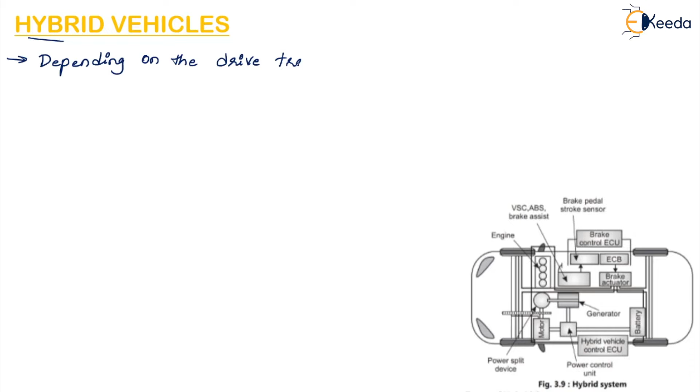So depending on the drivetrain structure, that is, drivetrain structure here means how the motor and engine are connected. This is called the drivetrain. Okay. So we can distinguish the hybrid vehicles as series hybrid vehicles, parallel hybrid vehicles, or the third one, the combined hybrid vehicles. So these are the important types of hybrid vehicles.

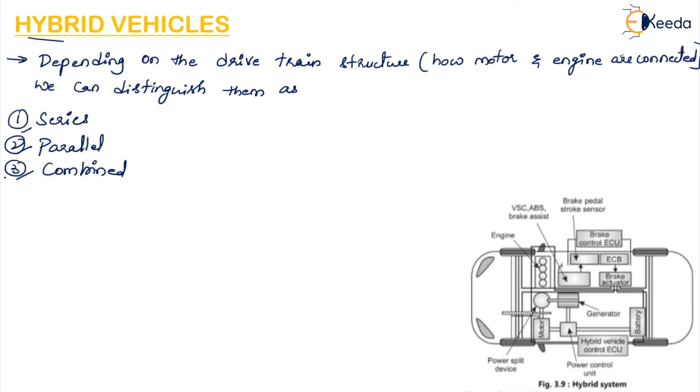So motors are the workhorses of the hybrid electric vehicle drive systems. So here motors, that is nothing but the electricity driving part, are the workhorses. They are called the workhorses of hybrid electric vehicles. So this electric traction motor will drive the wheels of the vehicle. Why are they called the workhorses? Because the electric traction motors will drive the wheels of the vehicle.

So in a traditional vehicle, the engine must ramp up before the full torque can be produced. Here, an electric motor will provide the full torque at low speeds. So, usually in the vehicles which are driven on fuels, what happens? The engine must ramp up, or it must start up, before the full torque can be developed. But here, in these hybrid vehicles, this electric motor will provide full torque at low speeds. So the electric motor will provide full torque at low speeds.

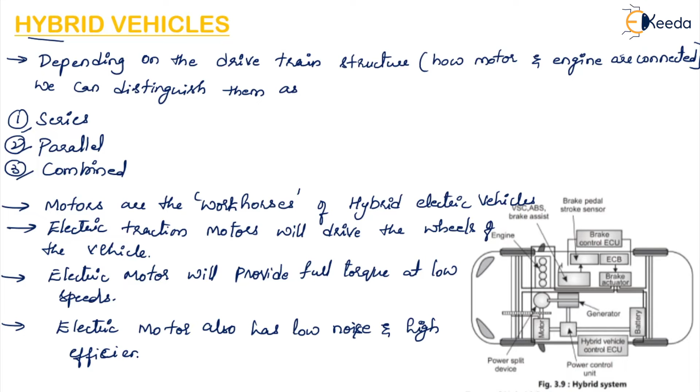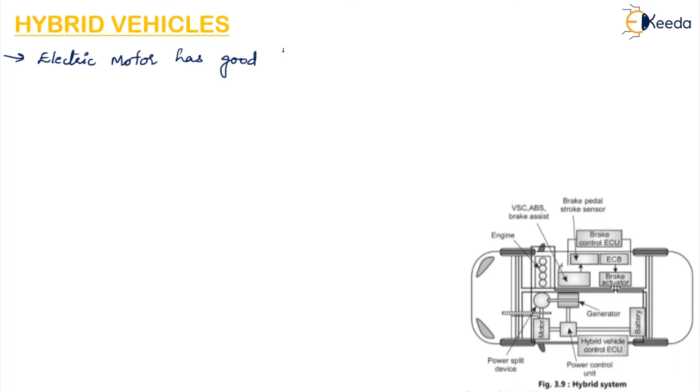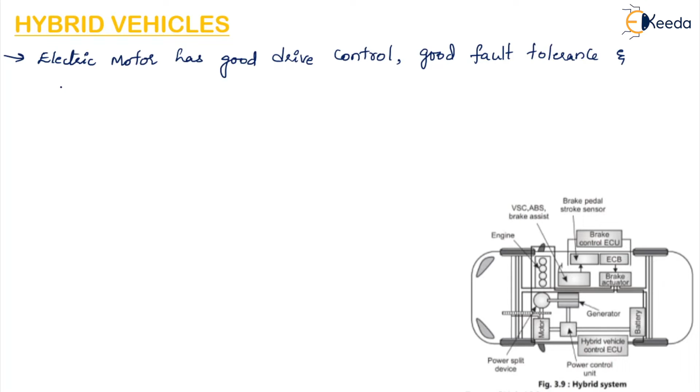So there are other advantages of the motor as well. The other advantages of this electric motor are that it has good drive control, good fault tolerance, and flexibility in relation to voltage fluctuation. Okay, so it will provide so many advantages.

So the main advantage of this electromotor is the possibility to function as a generator. So this motor can also function as a generator. So the main advantage of this electromotor is the possibility to function as a generator.

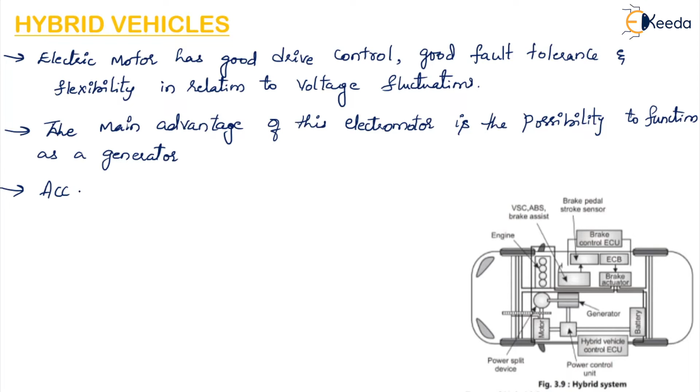And also accessories like power steering and air conditioning are powered by electric motors instead of being attached to the combustion engine. So here we see so many advantages of using these electric motors. Usually accessories like the power steering and air conditioning are attached to the combustion engine, but when you use these electric motors it can help them to function and it will provide the necessary power.

Are powered by the electric motor instead of being attached to the combustion engine. So what is the advantage of this, that is, the accessories being attached to the motor?

So the advantage is the efficiency gains, as the accessories can run at constant speed or can be switched off regardless of how fast the combustion engine is running. So we can see that the accessories can be switched off whenever we want, irrespective of how fast the engine is running. And also the accessories will run at a constant speed.

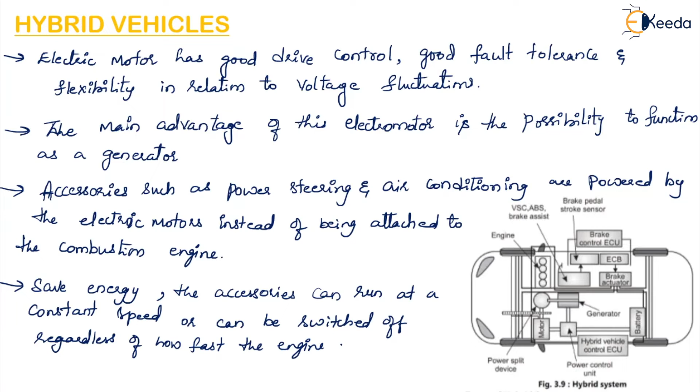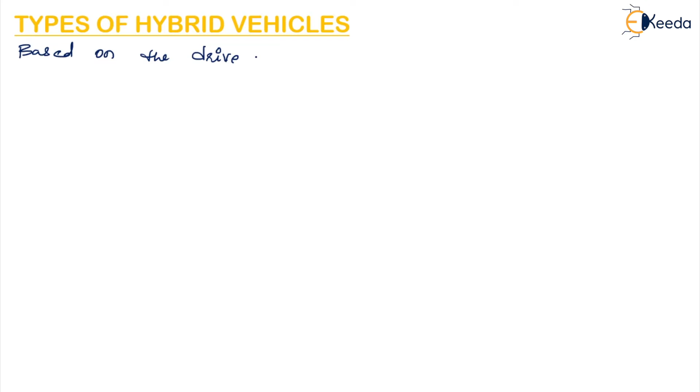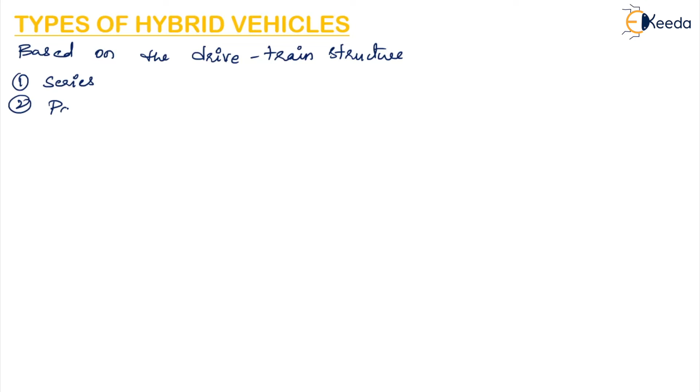Now we will discuss the types of hybrid vehicles. Based on the drivetrain structure, they are classified into three types. So based on the drivetrain structure, that is how the motor and the engine are connected, they are classified as series hybrid vehicles, parallel hybrid vehicles, and the third one is the combined, or series-parallel hybrid vehicle.

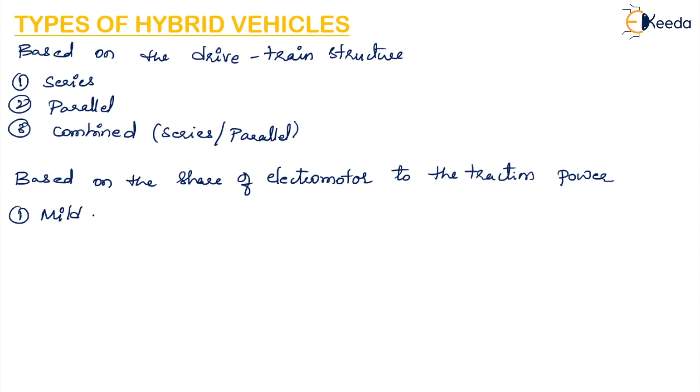Now, depending on the share of the electromotor to the traction power, that is, how much the electromotor is used to generate the traction power, they are classified as: first, the mild or micro hybrid vehicle; second, the power assist hybrid; third, the full hybrid; and fourth, the plug-in hybrid. So these are the different types of hybrid vehicles.

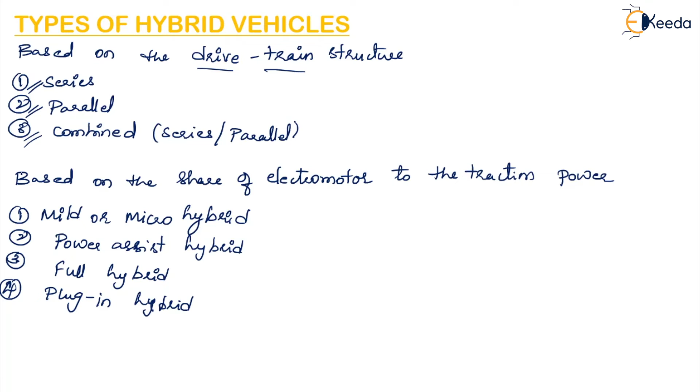So now we will discuss the important form, that is, how these vehicles are classified based on the drivetrain: the series, parallel and combination of series and parallel vehicles. Under normal driving conditions, the engine power is divided by the power split device. Here this circle is the power split device which we have already seen in the first figure. It will divide the engine power produced by the engine.

So some of the power from the engine, split by this power split device, will turn the generator, which in turn will drive the motor. Then the rest of the power drives the wheels directly. Here we can see A, B and C. B is referring to the electric motor which is driven by the generator. The wheels are driven by the power of the engine. So half power is used to run the generator, half is directly used to run the wheels, and the generator in turn runs the electric motor. The power allocation is controlled to maximize the efficiency.

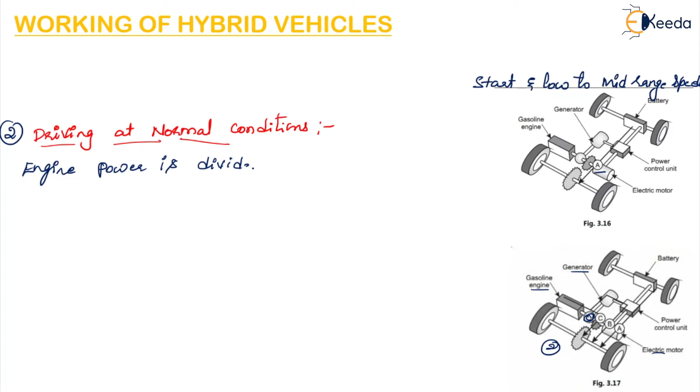So here engine power is divided by the power split device. Some of the power turns the generator, which in turn drives the motor. So here the motor is referred to with the letter B.

The rest of the power drives the wheels directly, that is C. So power allocation is controlled to maximize the efficiency.

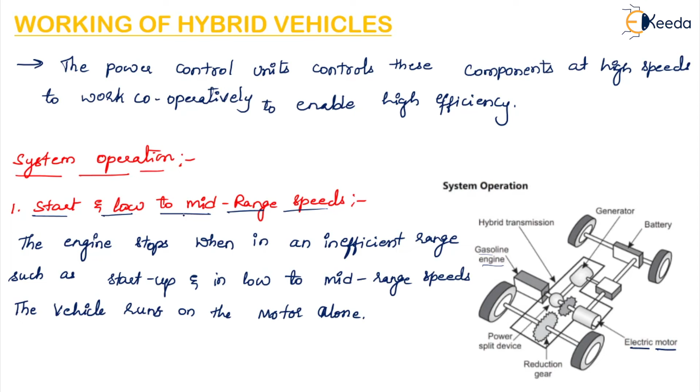So we have seen at start and low and mid range speeds how the engine is working, and at normal driving condition how it is working. Then we will see how the engine is working at sudden acceleration. So this is figure 3, which is showing how the engine works at sudden acceleration.

So when there is sudden acceleration, then extra power is supplied from the battery, which is given as A, while the engine and high output motor provide smooth response for improved acceleration characteristics. So when there is sudden acceleration, the extra power which is required is supplied by the battery.

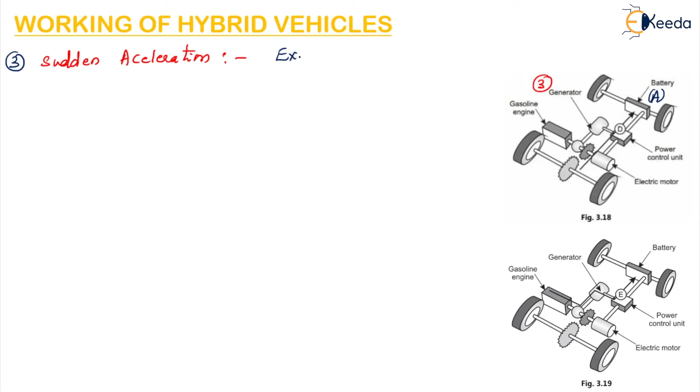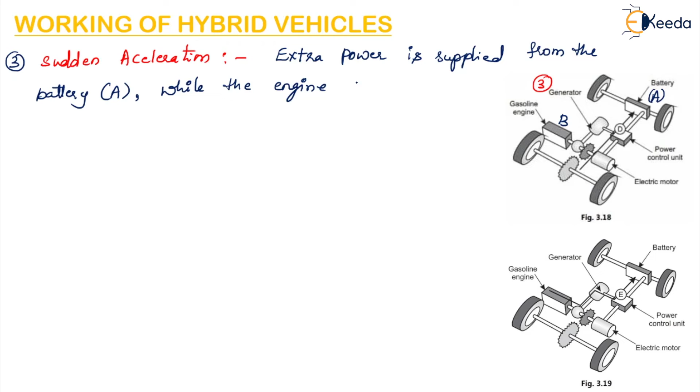So extra power is supplied from the battery A, while the engine, that is engine is B, and the high output motor, that is C.

So engine is B, that is B plus C provide smooth response for improved acceleration characteristics.

So when the engine is decelerating or braking, what happens? Deceleration and brake. When you provide a brake and the engine is slowing down, the high output motor acts as a high output generator. So this is the fourth, that is deceleration and brake.

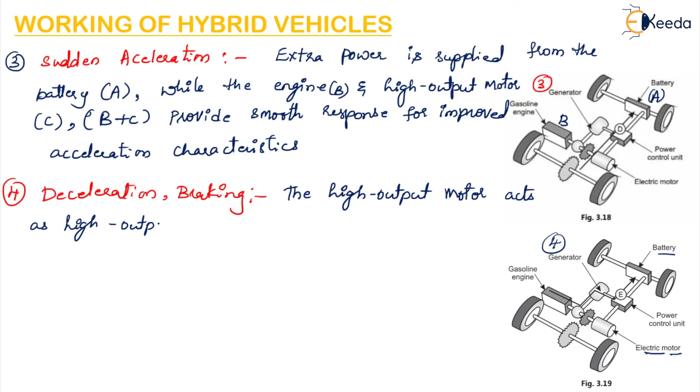So the high output motor acts as a high output generator driven by the vehicle's wheels. So this regenerative braking system recovers kinetic energy.

So the kinetic energy of the moving vehicle will be recovered as electrical energy because of braking, and this energy will be stored in the high performance battery.

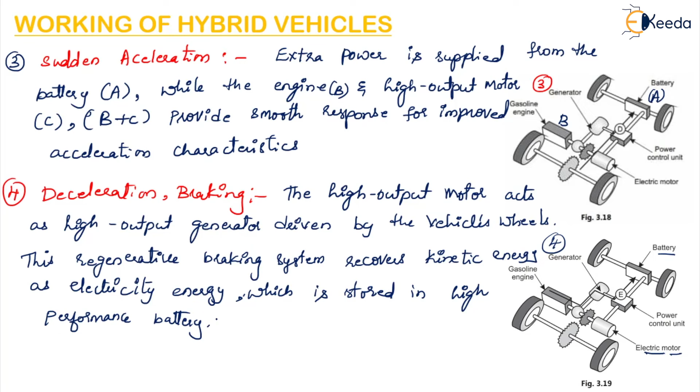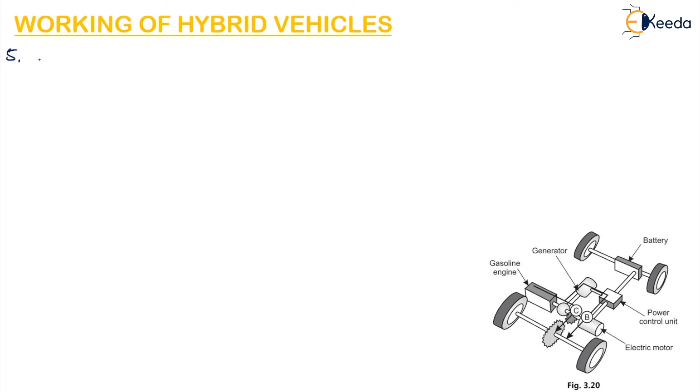The next function is battery recharge. So how does the engine work when the battery is being recharged? The battery level is managed to maintain sufficient reserves. So the engine drives the generator to recharge the battery when necessary.

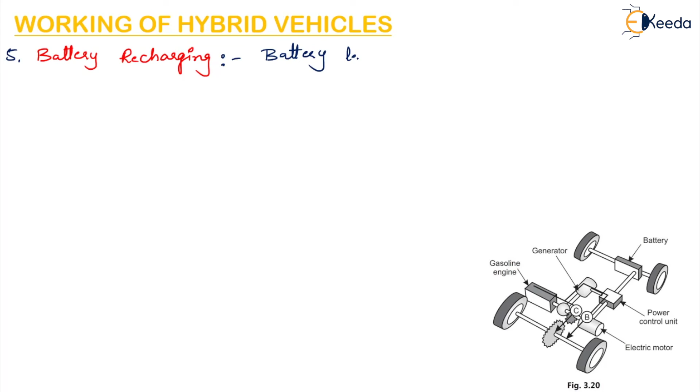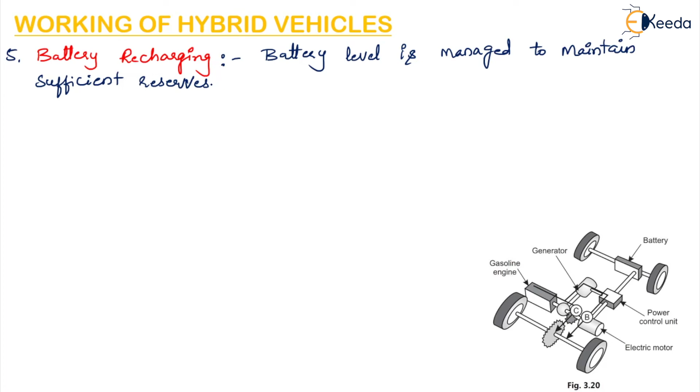So why is the battery required? The battery is required for sufficient reserve. It is a form of reserve fuel which is present for crisis conditions. So the engine drives the generator to recharge the battery when necessary.

Then at rest. So at rest, the engine will stop automatically.

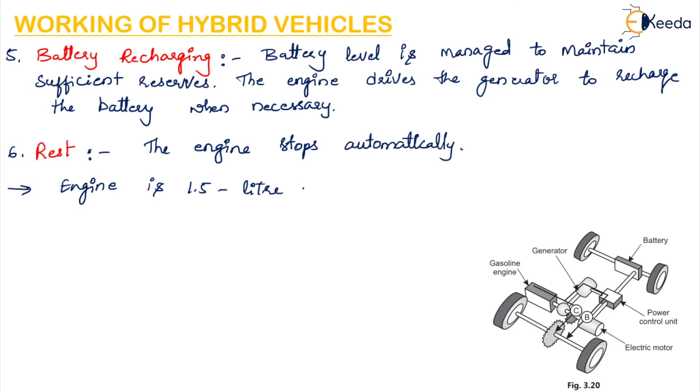So here a 1.5-liter engine is used which achieves high efficiency by using the Atkinson cycle as one of the most heat efficient high expansion ratio cycles. So this engine, as I have already told you, is a 1.5 liter high efficiency engine and uses

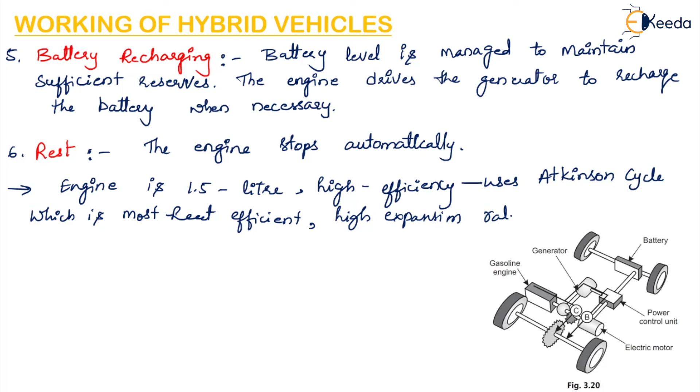Atkinson's cycle, which is one of the most heat efficient high expansion ratio cycles. Because the expansion ratio is increased by reducing the volume of the combustion chamber, the chamber is evacuated only after the expansion force has sufficiently fallen. So expansion ratio can be increased by reducing the volume of the combustion chamber.

So expansion ratio can be increased by reducing the volume of the combustion chamber. That is why they have evacuated the chamber only after the expansion force has sufficiently fallen. So this engine can extract all of the explosion energy.

So this engine can extract all of the explosion energy. So usage of this type of engine, when it works synergically with motor output, achieves high efficiency operation. So when this engine is combined with an electric motor, it will achieve high efficiency operation.